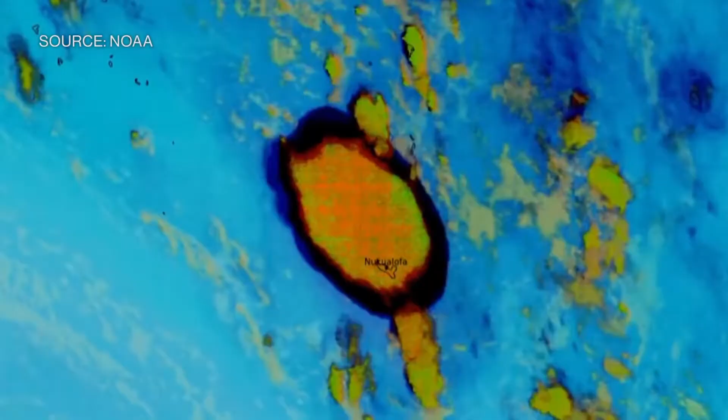However, to deepen our knowledge, we needed to dive deeper ourselves. To accomplish this, we once again developed vessels and tools we could use to make these observations beneath the surface.

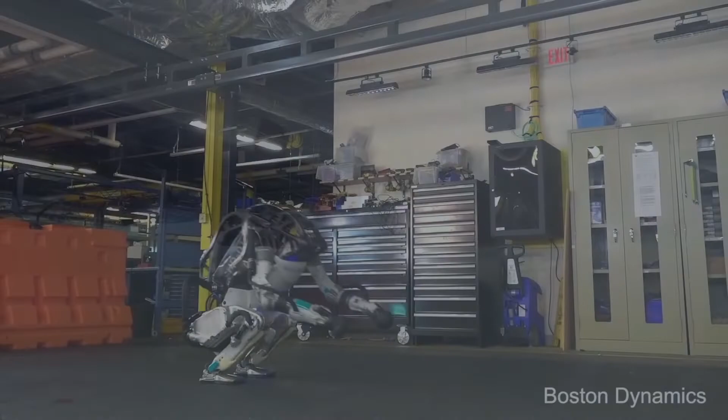As time moved on, new technologies continued to develop and become more available to us. Now we wish to implement those technologies to further aid our exploration and discovery.

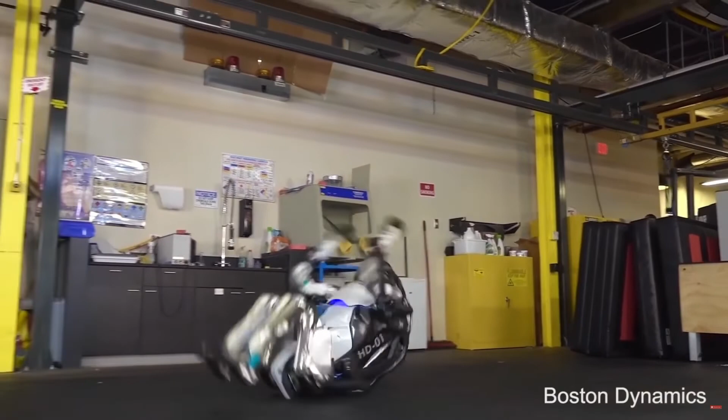Our team has been tasked with creating an underwater device capable of locomotion within coastal environments. The device is to serve as a research platform for surveying and experimentation. It should be bio-inspired. Our clients expressed further needs for the device to be modular and adaptable, lightweight, and silent during operation.

These needs expressed by our clients, though vague, gave us an outline on what goals we needed to meet. The primary needs for the device were: bio-inspired designs, locomotion capabilities within coastal environments, modularity for adaptive use, quiet operation, and a compact size and weight.

Through further communication, our team tried to get specifics where we could. How heavy is lightweight? What kind of experimentation do the clients have in mind for the device? Unfortunately, the clients didn't always have the answers we wanted, so it was up to us to interpret and translate the requests.

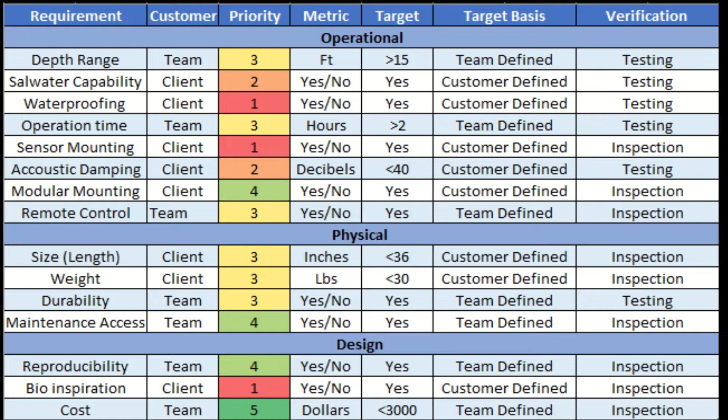We talked back and forth amongst the team and came up with quantifiable metrics where we could. These metrics would be used to define each need and determine if it satisfied them once tested. Now that our goals were set, we sent our specifications to our clients and received their approval before starting the design phase.

With the tasks defined and our goals set, our team was satisfied with our initial meetings and began moving forward with the project. However, our greatest challenge began to rear its head: communication.

At first, communicating with our client and organizing meetups was difficult. Their schedules and ours did not align, and so we offered a solution. We would hold our meetings at a standard time when the majority of our team was available.

We would then schedule supplementary meetings with the clients as needed, such as when the team had questions to ask them or the clients wanted an update about our work.

One of the two clients approved, and we shifted our focus to developing the device, believing that we had an understanding about meetings. This decision was made in late October.

Flash forward to the end of February. Over the few months, our team had asked our clients a few questions here and there, and we operated autonomously while we ironed out our design concepts.

Our clients did not attend a majority of our meetings, nor did they express concerns on the matter during this period. Towards the middle of our term, our team had made enough progress that we thought it would be a good idea to reach out and update the clients.

After seeing our update, the clients raised concerns and wished to meet to discuss our designs. During the meeting, the client who attended further expressed their partner's and their own dissatisfaction with a lack of communication and concern about some of our design choices.

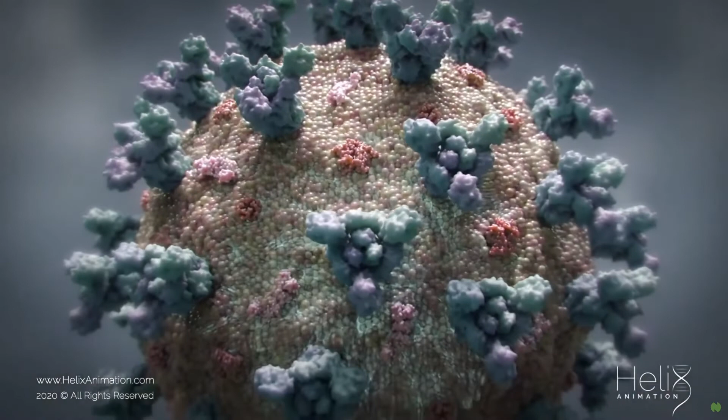Internal communication has also affected our progress, as the entirety of our project has been conducted during the COVID-19 pandemic. Our team relies heavily on virtual communication, which creates delay and room for interpretation between the team members. To address this, we have shifted to working together in person when possible so that each member is able to see a larger picture of the device and clearly see how to integrate their designs with one another.

Hi, my name is Forrest Kramer. I'm the recorder for Capstone Team 10, and I also work the propulsion and bodywork of the robot. Today, I'll be talking about the propulsion method used in our robot.

One of the main requirements for our capstone was that the robot needed to be bio-inspired. The inspiration for this actually came before we even selected the capstone. I was reading a hard science fiction novel called Manifold by Stephen Baxter, in which a squid is genetically modified to be super intelligent and trained to pilot a spacecraft. The idea being that a squid uses jet propulsion naturally underwater, and this would translate to a natural ability to control a jet-propelled spacecraft. This led to a mild fascination with squids and cephalopods, and when the capstone projects were presented, a bio-inspired underwater robot jumped out at me, and an idea formed for a propulsion method.

I discussed this idea with the team, and we submitted a bid for this project, among others. After we won the bid for the underwater robot, we discussed the idea further and worked together to refine it, and it became the backbone of our project.

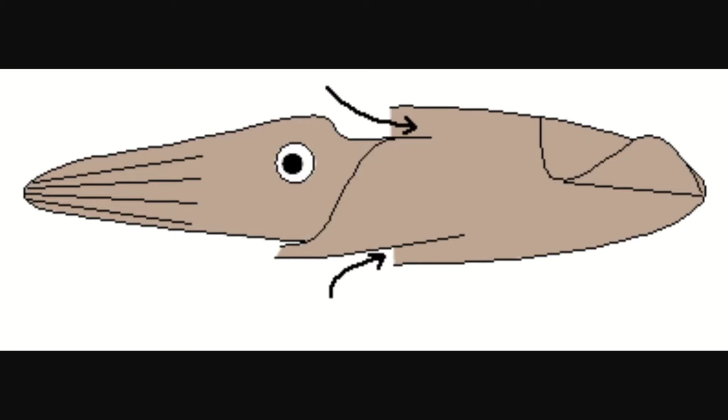The idea is based on the way that a squid propels itself through the water. As you can see here, squids use a form of natural jet propulsion, where they fill a cavity in their mantle with water, and then expel it out through a small nozzle in order to generate force. They then use fins to control their direction and fine-tune their movement.

Our adaptation of this propulsion method had several iterations, but the general concept remained the same throughout. We would intake water through channels inside of the robot and deposit it into a chamber where it gets forced out through a small nozzle.

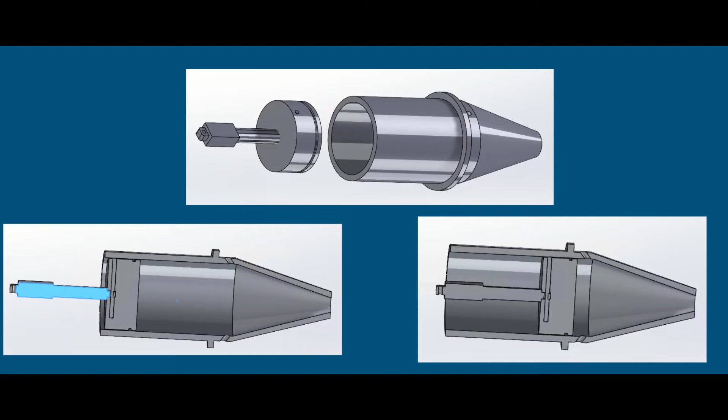Initially, we wanted to use a linear actuator in combination with a piston head to force the water out, but we ran into an issue where duty cycles prevented this method from being effective. The duty cycle here is the ratio between the actuator being active and non-active. Linear actuators tend to have low duty cycles due to the heat generated, so this really eliminated this option.

We also toyed with the idea of using a Tesla valve instead of a check valve, but unfortunately we couldn't get that to work easily with the scale we were operating in.

One idea suggested, to make the design even more bio-inspired, was to use a flexible membrane as a muscle that would get compressed and decompressed rapidly in order to force the water through our outlet nozzle. After further consideration and discussion into the materials and the forces required, it was deemed too complex and inefficient to adopt purely in the name of bio-inspiration, especially as it came at the cost of performance.

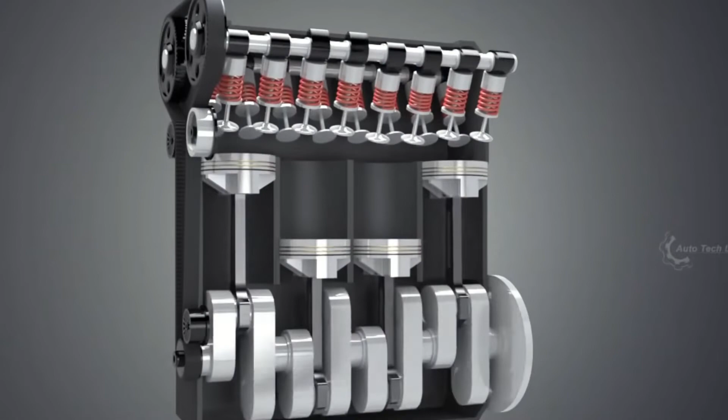We spent a lot of time working with linear actuators until it was discovered that it didn't fit within our size and budget constraints. So finally, we have fallen upon a much simpler method of using a simple DC motor, which will cause a piston to fire in a similar way that an engine piston does. This will allow for an intake stroke to pull water into the chamber with negative pressure, and then an outstroke to push the water through the nozzle and create a propulsive force.

Our next steps over spring break and early next term will be to construct a test model for this design and work through any problems that may arise.

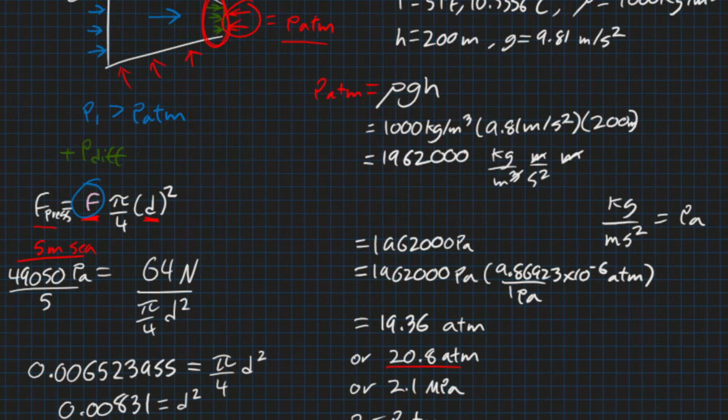An important aspect of this design is the nozzle that the water will get pushed through. In order to design this nozzle, we need to determine the most efficient nozzle ratio and outlet diameter. We settled upon a 5:1 nozzle ratio based on our research of underwater jet propulsion, and then did some calculations to determine our diameters required.

The goal here is to ensure that the pressure at the outlet of the nozzle produced by our piston is greater than the surrounding sea pressure. To do this, we use this equation here. This relates the force created by the piston, the geometry of our nozzle, and the pressure at a given sea level. In this case, our unknown would be variable d, which is the diameter of the nozzle.

Through the solution, we can find the minimum inlet nozzle diameter required for our design in order to exceed the pressure of seawater at that depth, and with our 5:1 ratio, we can then use that to find the diameter of the outlet nozzle as well.

Finally, one of the constraints provided with this project was the decibel level, and the need for the robot to be quiet. We were not provided with a specific decibel level, so we had to conduct some research in order to find an acceptable decibel limit. We finally established a limit of 60 decibels measured at 12 inches away from the robot.

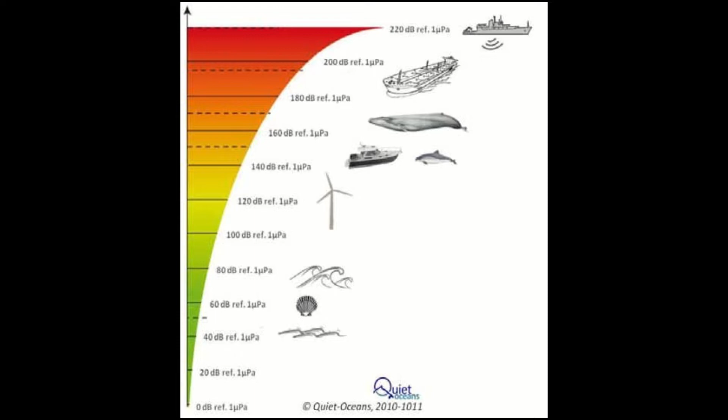Unfortunately, it is extremely difficult to test decibel levels underwater, and the testing equipment required is very expensive. We asked PSU if they would be willing to obtain one that we could use, but this ended up falling through. So as a fallback, we used our ME411 project to conduct testing for this problem.

We conducted some in-air experiments with the linear actuator used for previous prototypes, inside of a chamber constructed with the same carbon nylon composite that the robot will ultimately be made from, and compared several different soundproofing materials.

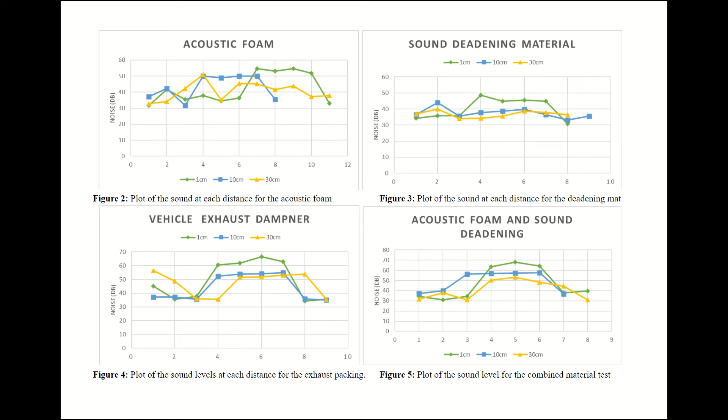Ultimately, we are making good progress with our propulsion design, and our next step is to select a specific motor that we can use and design a prototype to prove functionality before we can finally implement it into the final robot.

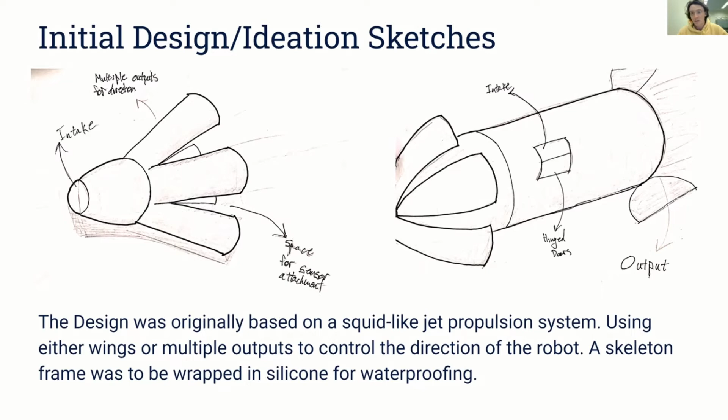These are just a couple of the initial design sketches we were looking at: having an intake, both featuring an intake and then an outlet through the back that the piston would expel the water out of. We went about designing that and moving forward with it in CAD.

Here's our initial CAD designs. We knew it was going to be a 3D printed part, so we went with a skeleton style design, shown on the bottom right, with a sensor mounting plate inside the skeleton that would be modular enough to put whatever kind of sensor you wanted on it. We figured we'd wrap that skeleton in a waterproof material like silicone.

The nose cone is shown on the upper left and upper right. It used mounting brackets to mount the wings I mentioned earlier, to control the direction of the robot. On the bottom left, you see a preliminary design of the propulsion system, a cylinder piston system.

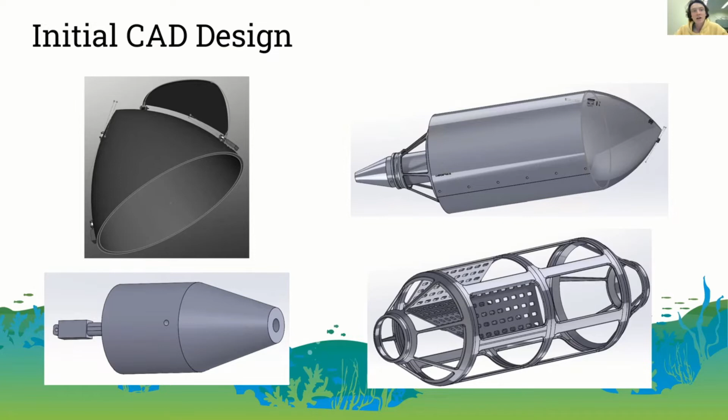Once we had this all drafted up and were looking at these renders and sketches, we realized we started to run into a couple of problems we had to address. The main one was that after drafting all this up, it wasn't looking very bio-inspired anymore, and we knew we had to go back to the drawing board.

We also realized the silicone wrapping was going to be more trouble than it was worth as far as cutting it out right and sealing it, because there's the propulsion system and a linear actuator inside that needs to be watertight. We didn't want to run into problems with water leaking in and messing with the electronics.

Also, with wrapping the skeleton and connecting it to the nose cone, we realized that was going to be a difficult task. We needed to figure out a way to cohesively design all these parts together and get them to seal in a way we knew would be waterproof and more cohesive.

The last issue we realized after receiving the linear actuator for the propulsion system is that we'd need to soundproof our robot, because the linear actuator makes quite a bit of noise. Like I said at the beginning of this presentation, a quiet robot was one of the main goals, along with bio-inspiration, being quiet, and being modular.

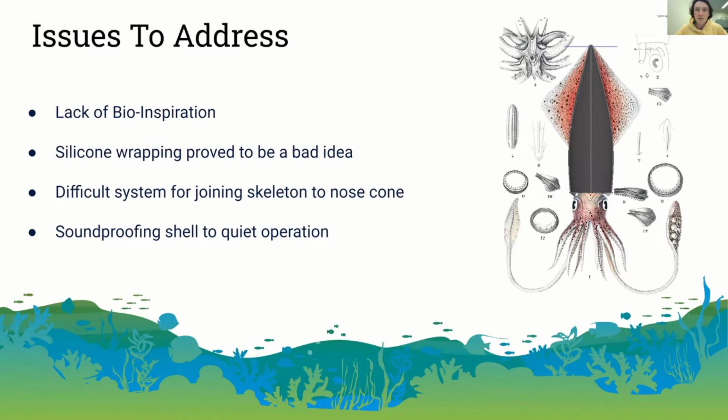From here, we went back to the drawing board and iterated on the design, and I'm going to let Nick take over and talk about that a little bit.

Hi, I'm Nick Cornejo. I'm one of the group members who has been working on the skeleton and the body's shell design in 3D SolidWorks, and as the sketch drawer of the actual model itself.

We had to move away from our original design because our sponsors and us as well realized it wasn't very bio-inspired. So we had to remodel our design before we could actually get to prototyping. The model itself is still going to be a cephalopod, looking into squids, but we're going to try and take more of their physical appearance and aspects of how they move in the ocean.

As seen in this slide, the sketches use a two-shell design, a skeleton frame on the inside, as well as gasket fittings that will be used to seal up the seams and make sure minimal water gets into the shell itself. Although most of the components inside the shell will be somewhat water resistant.

The shell design is going to be constructed from a 3D printer. The shell itself will be secured together with some smaller 2mm screws to assure a good seal between the gaskets and the two shells.

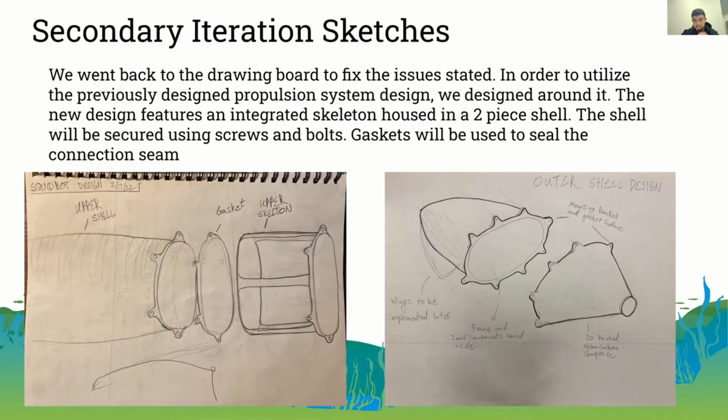So as we're moving forward with this project, this next slide shows what we're coming up with at this point, trying to get it to look more like a cephalopod and resemble the movement of a cephalopod itself. As you can see, we're using a wing design that is going to flap around to move left and right, to rotate the squid itself to get different angles.

We're going to be using possibly a Picatinny rail on top and bottom of the robot to try and get good mounting points for a camera, temperature sensor, and possibly a salinity sensor.

There's also a hole for wiring because we're going to be using a buoy to control the robot itself. Currently we're using a simpler design on the inner part of this robot because we thought it would be too complicated to have every single component, and we wouldn't be able to maneuver the robot well underwater if it was fully automated, which might cause issues further on down the road as we finish this project.

The robot is going to be a two-piece design, as I said before. The wings will possibly be used, and we will possibly be using a servo motor to manipulate the wings up or down. Then there's going to be the linear actuator inside, which we'll see in a bit, sitting inside the shell within a skeleton until we finalize our design.

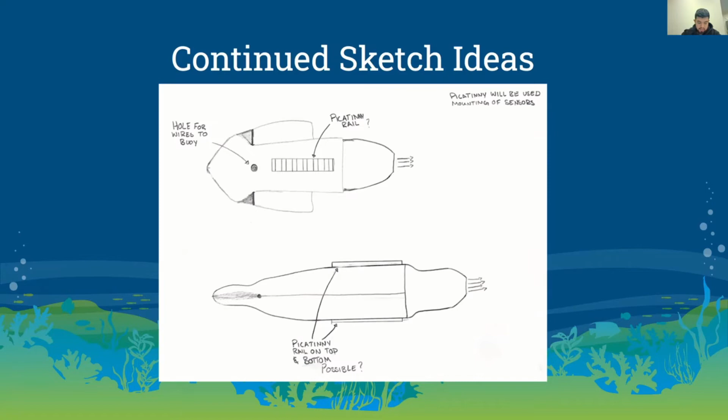So we're going to move on to the next part. This is our CAD design so far. What we've been thinking is to have a shell that we've already designed, and it does look like a squid somewhat. We're going to use a smaller skeleton that's just going to use the linear actuator, which will later be attached to the propulsion system, so we can have a final model in the coming weeks and move on to prototyping.

As you can see, it's a little bit more of a simple design, way simpler than the original one, because we're moving away from having controls inside the shell itself and using a different form of movement for the robot and communication.

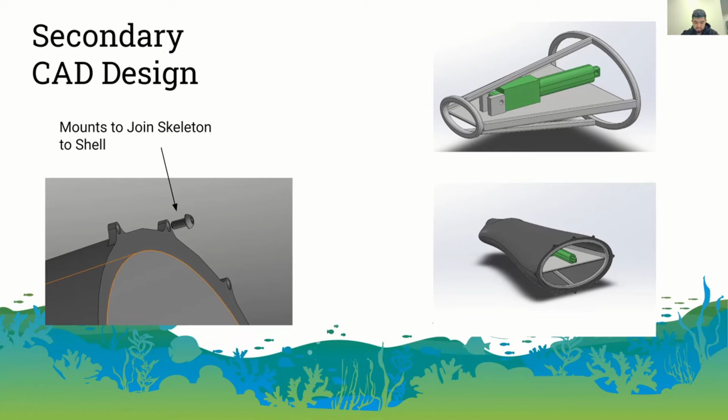With our design, we also have to take into consideration the amount of noise produced by the linear actuator and probably the servo motors that we're going to have. So we conducted a test of the sound noise level of our linear actuator inside a 3D printed box of the material we are going to be using, as well as three different types of soundproofing material: muffler packing, sound deadening mat, and acoustic foam. All three of these materials were somewhat noise reducing.

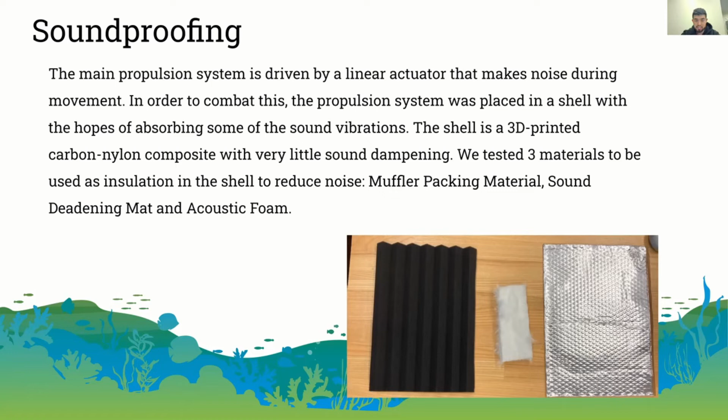There will be a recording of the experiment done and talked about by our team leader, Connor Gorman. All right, we're in the 360 lab right now, and we are running our experiment to test different soundproofings for our motor.

Our setup is that we have our linear actuator in this little black box here, and we put some soundproofing material in — right now we're doing soundproof foam — so we line the inside of the box with those materials. We're now screwing it tight, and when it's all the way on, we hook it up to the battery and record with the sound device. We can test the decibel level and see what kind of soundproofing we're getting.

We're going to make a graph comparing different distances and different materials. The importance of the material the box is made out of is that it's the same material as our robot will be - carbon fiber nylon, the same material we're using to print the robot. So we're testing with the same material we'll use in the final robot.

I'm back to talk about the conclusion of our soundproofing experiment and what we figured out in the lab testing all the soundproofing materials. The first thing we did was calculate the coefficient of sound reduction of each material at a 1 centimeter distance, since there's the most variation in readings at 1 centimeter, being closest to the motor, so the readings were also the highest.

For the acoustic foam, we found it had a coefficient of sound reduction of 0.63. The sound deadening mat was 0.85, the muffler packing material was negative 0.09, and the sound deadening mat and foam stacked together was negative 0.42.

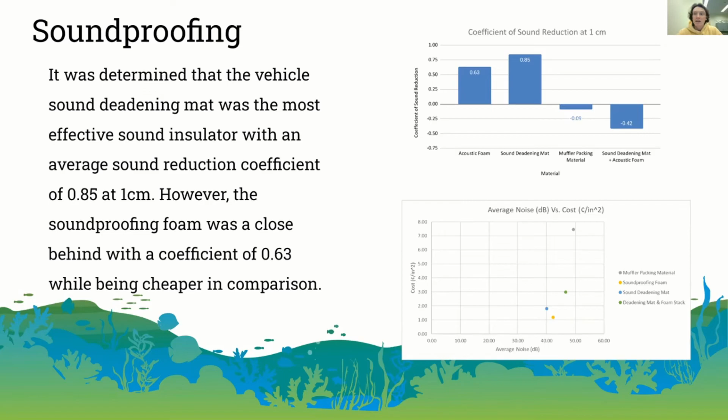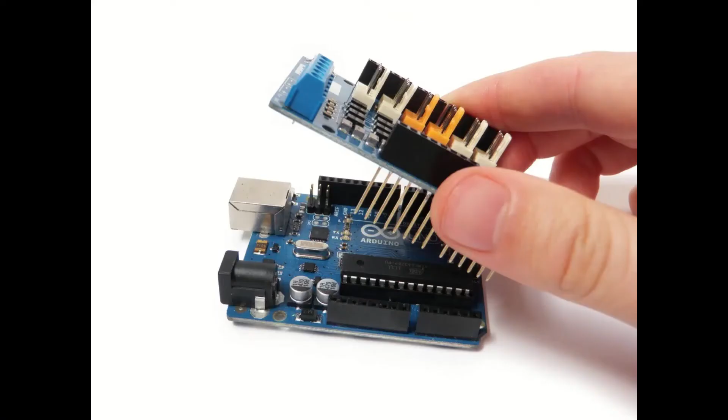For our controls, we're using Arduino Megas, giving us plenty of digital and analog pinouts for anything we need. Megas are widely supported by the Arduino community, and we can easily add hats or shields for control of the motors, the display, and wireless communication to our buoy. The programming will be written using the Arduino IDE, as our team has experience in that environment.

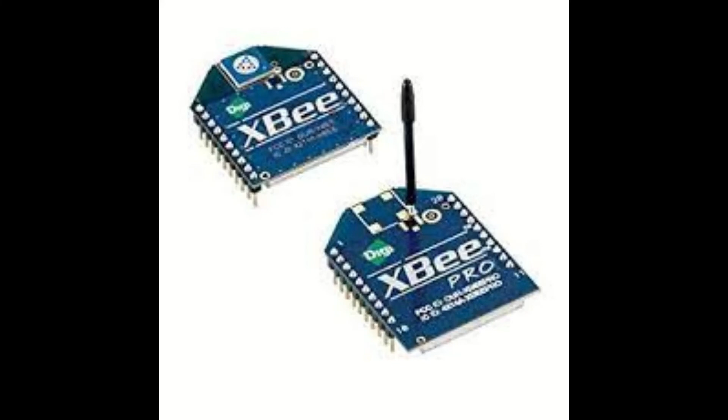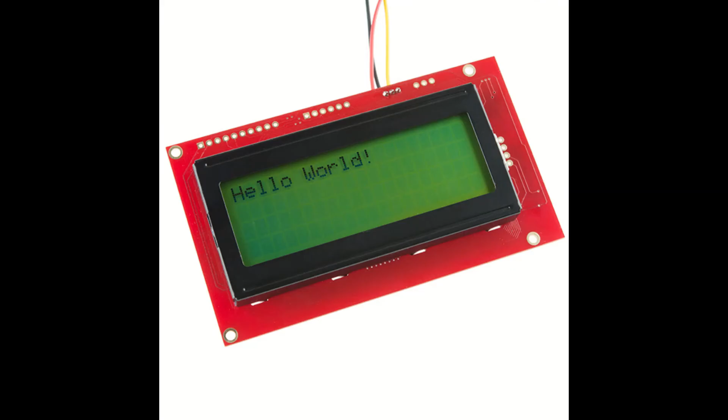The remote control and the robot will each have their own Arduino and leverage a 2.4 gigahertz XBee radio to communicate. XBee radios have been around for a while and are well supported. The remote control will be a custom handheld pendant housing a simple 4x20 serial display for showing the current command being given and the battery life. Directional control of the robot will be given using joysticks, much like thumbsticks found in a video game controller.

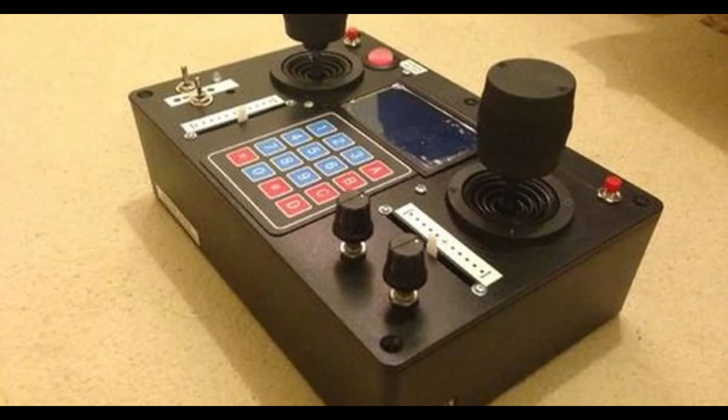When deciding to control a robot, you need to decide whether it will operate autonomously or be controlled manually via remote control. Autonomous controls are tempting, as they allow the robot to operate without external wiring or transmitters. However, the tasks the robot performs need to be very specific and laid out in clear sequences for a programmer to write the code. By taking this approach, we severely limit the number of scenarios the robot can be used in, since we can only account for so many possibilities.

For example, if a customer was conducting research within a reef and wanted to change the robot's path during the experiment, they couldn't without retrieving and reprogramming it. Furthermore, we eliminate the robot's ability to adapt to unplanned circumstances, such as sea life interfering with it or currents throwing it off course, as seen with another popular autonomous robot, the Roomba. This type of automation can quickly unravel when an unexpected object is introduced into the path.

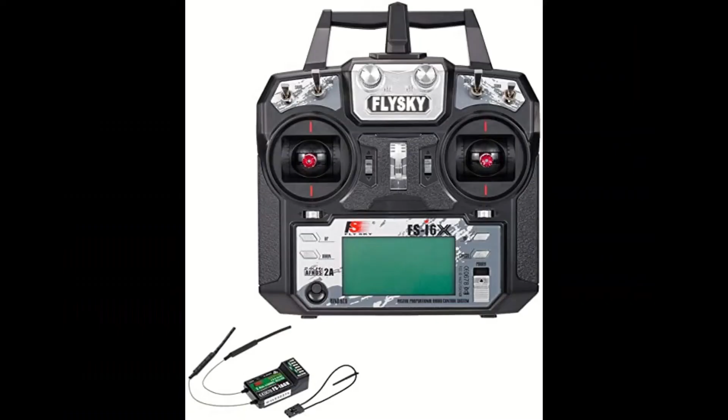Remote controlling alleviates these issues by allowing the customer to have total control of the robot at all times and the freedom to adjust how it is piloted to suit almost any purpose. As use cases are further defined, we could go back and write autonomous programs for specific needs.

With autonomous operation out of the way, we began to think about how we could remote control the robot. At first, the simplest way forward appeared to be using an off-the-shelf hobbyist remote control like those used with RC airplanes. These operate using a very common 2.4 gigahertz frequency and can be easily obtained. We knew we would need something more complicated at some point, but this would be a good start for manually testing the propulsion and fin systems.

However, before fully committing to the idea, we needed to investigate the range we would get using 2.4 gigahertz radio.

Over the air, 2.4 gigahertz radios are capable of achieving a range of up to 92 meters, but underwater is a lot different. It soon became clear that due to the conductive nature of water, we were going to run into trouble, and our intended environment, saltwater, is more conductive than freshwater. Because of this, radio frequencies do not travel very far before the signal significantly degrades.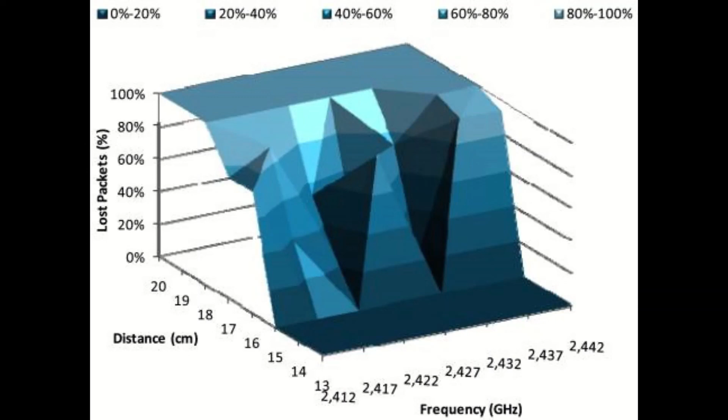Without a clear way to move forward with our remote controls underwater, we began to look at what some other submersible robots used and came across the idea of a buoy.

The idea of the buoy is that it would sit on top of the water with a retractable cable connecting it to the robot. Not only does this allow us to remote control the robot using an easy to find 2.4 gigahertz radio, but it allows us to keep the very heavy battery out of the robot and keeps the electrical controls above water.

The retractable cable will be able to spool out extra cable while the robot moves further away from the buoy and retract the cable as it comes closer. This should minimize the risk of tangling the tether on objects in the water while also providing a means of retrieving the robot should something happen to it.

After discussing and collaborating with our sponsors, we got a better feel of what they are looking for in a robot design, and we've improved our focus on bioinspiration. We have iterated upon our initial design, making changes to fall more in line with the customer's needs, and created something that they both approve of and are interested in seeing us complete.

We are in the process of finalizing the body of the robot and the controls of the robot in order to get the model into the prototyping phase, and we have a clear plan on how to get there now.